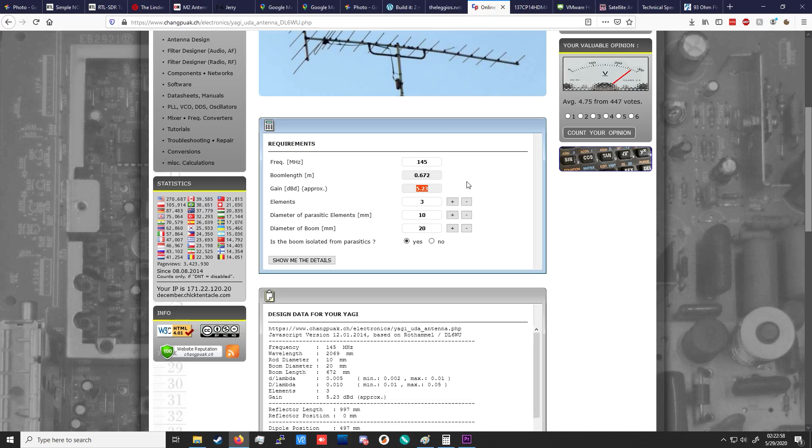And this guy is breaking the laws of physics on his website. This number's wrong. This should be 7.3 dBi. We can check that with an online Yagi calculator real quick where we see we get 5.23 dBd. That's gain relative to the half-wave dipole antenna, which we know plus 2.15 will give us the gain relative to the theoretical isotropic antenna, which gives us that 7.3 figure. This is not dBd, it's dBi.

That does bother me. I doubt he's going to fix it because the page is from 1993, but hey, one can hope. Also, some of these diagrams just aren't really useful. This has no scale whatsoever. We see there's a null in the back and there's a pattern out there, but I'm not sure what to do with this so much.

His theoretical radiation pattern is a little more useful to us. We can figure out the 3 dB beam width from this. This is minus 10 dB down at the second circle here, which happens at the full 90 degrees. So if you try to estimate 3, you can see it probably lines up with his 67.5 degree figure. He says we're 3 dB down. So yeah, that's about 3, 60 degrees just there. That's useful. His diagram for the measurements is very well put together.

And the really important design characteristic of this antenna is that it's super easy to match it to 50 ohms. Typically, Yagis match with a variety of different types of matching networks, but they're not done with lumped elements or coax. They're done with these things called gamma matches or T matches. And basically what they are is you put a small metal element behind the feed point of the antenna, and that metal element becomes the actual feed point. And then it has sliding bars on one or both sides of it, and you slide the bars between those two elements to tune the input impedance so it is what you want.

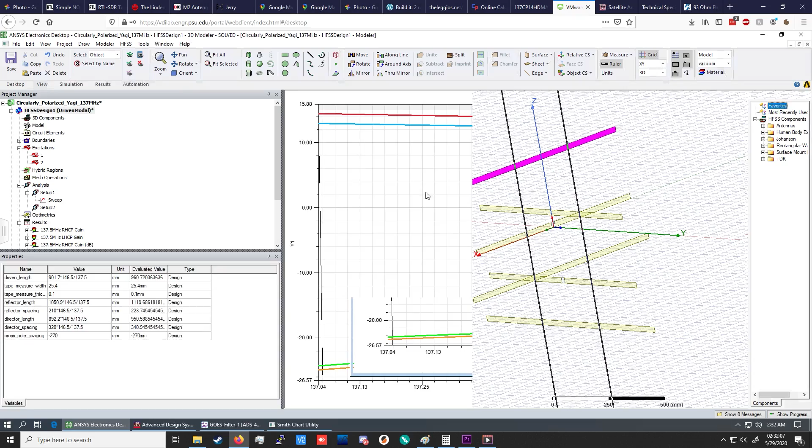So now we've seen the source material for a tape measure Yagi. How am I going to make that circular polarization? Well, the first thing I did was just draw 2 of these in, because when you want a circular polarized Yagi, you get 2 Yagis and you put them 90 degrees apart and then you phase them so that you get circular polarization correctly.

So I just drew 2 of these into HFSS here, and then I scaled the measurements by my frequency versus the original design frequency. So these are the stainless steel material from the stock HFSS library. I drew a director, my 2 driven elements separately, and then a main reflector, and I copied that for the second Yagi there, and then I rotated them 90 degrees.

Now everything in the simulation is defined from these variables: the driven length, tape measure width, reflector spacing, etc. I converted the imperial measurements from WB2HOL's write-up to metric in millimeters, and then I multiplied them by the ratio of my frequencies, 146.5 over 137.5, noting that the original frequency is on the top of this ratio, even though that seems to defy dimensional analysis, because remember, it needs to be 1 over f over 1 over f, so that we have a longer wavelength at lower frequency here.

So then I get all my new values, and there's only one measurement that was optimized by me as opposed to just scaled from the original design here, and that's the cross-pole spacing. And we'll get to why that is what it is in a little bit.

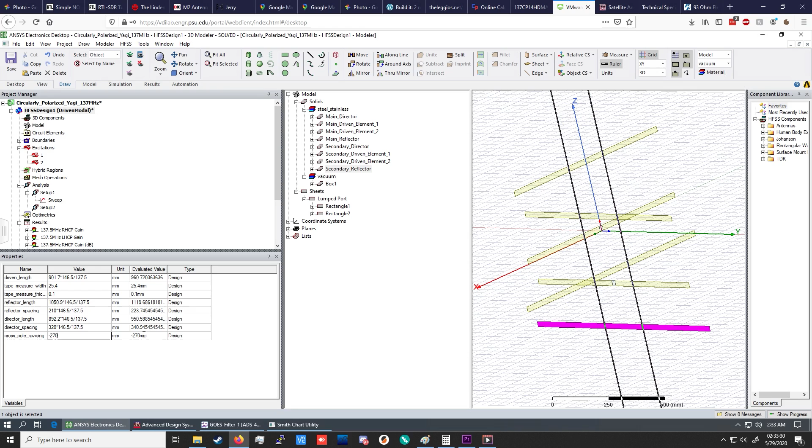But when I was initially starting out and I'm trying to figure out how to make a circular polarized Yagi, I know the general concept is to phase two Yagis that are placed in orthogonal directions to each other. I decided I'd go and I'd look at some commercial Yagi designs. So this one's by M2 Antennas.

This thing probably costs a small fortune. Less than 1,000, I bet, but something ridiculous, so I wasn't going to buy this. Also too heavy to move with your hands, probably. You can see that they're using that T-match network that I talked about earlier.

And you can see that they have, well, we could take a subset of this and just look at three elements here. So the ones with the T-match are the driven elements. Here's the one in the vertical, and here's the one in the horizontal. Now if we count the elements, we see we have a director, driven, reflector, and then that's the end of the vertical antenna here. And for the other antenna, we have director, director, driven, reflector. So the driven of the second antenna, the further back one, is behind the reflector of the first antenna.

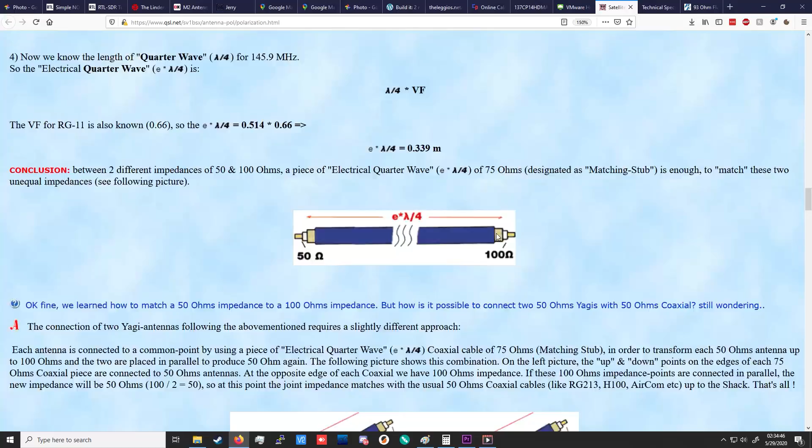Now, I had no idea why that was at this time. I was like, well, why does the spacing need to be what it is? But I found this really good reference, which I'll leave linked in the description, that's about making circular polarized Yagis for amateur radio satellite work. So they start by describing what is circular polarization, how do you get it. They show the naive approach, which is to build a helical antenna.

Now these guys work really well. They're not particularly difficult to match to. I actually wonder, and this is an open question for anybody that wants to try it, if you build a VHF or a UHF, like 440 megahertz or 144 megahertz, ham radio bands, helical antenna, and you're operating it in axial mode, can you use an IB crazy wave trap match down at those frequencies? That would be an interesting experiment.

The other option is, of course, the cross Yagi that we talked about. And now in this diagram here, these crosses look like they're right on top of each other. It's pretty difficult for me to tell, but it looks like the elements practically have no spacing between each other. So it turns out there's two ways to get the correct phasing between these, which is that basically, if the E-fields are starting at the same place, as shown in this diagram, we see the E-fields hitting this plane right here, they should be 90 degrees out of phase, right?

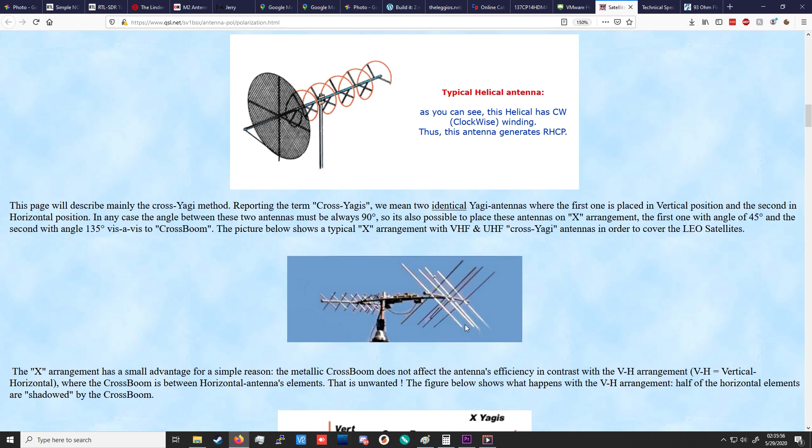So if your antennas are right on top of each other and the driven element of each antenna is in the same spot, you need a 90-degree phasing line. But if you have some spacing, that might not be the case. So the other purest option to get circular polarization is to do a lambda over 4 spacing between your two driven elements. So in free space, this represents a 90-degree phase change, and you'll get the circular polarization. Whether you get right or left-hand circular polarization depends on how you connect the conductors to each of these.

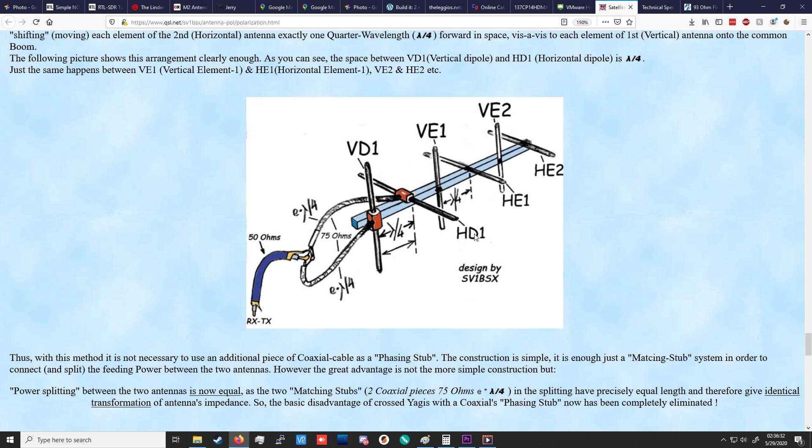So basically, you could go ahead and try it in the simulator, if you don't want to have to think through it. And if you have the wrong circular polarization, you just flip the connection on one of these guys, and it'll change the relation of the phase, and you'll get the other circular polarization.

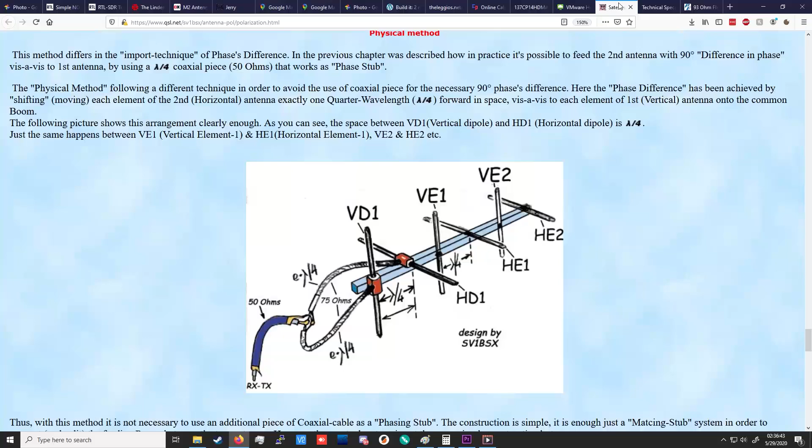Now, in my simulation, and based on their diagram, I'm not sure what their actual spacing was in this commercial Yagi, but with my driven element behind the other reflector, it's not a full quarter wave away. And if I made it a quarter wave away, the antenna would kind of be unwieldy, a little bit too long for my liking. Instead, I just went with what that spacing is, and I had to figure out what that was in terms of the actual phase change in free space. So that's a pretty simple calculation.

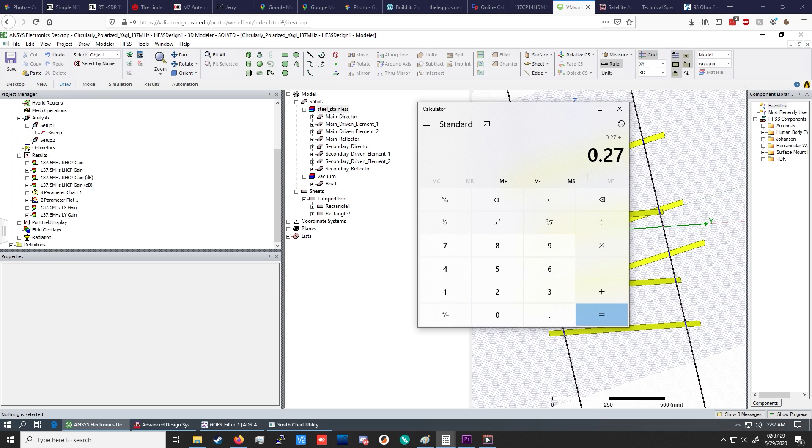Our wavelength is 2.18 meters, and we're 0.27, because it's 270 millimeters is the variable in the simulation, over 2.18, and then we know that we get 180 degrees every 0.5, so we'll go ahead and multiply that by 180 degrees and divide by 0.5, and we see that's a 44.5 degree phase change, which is effectively 45 degrees.

So in my simulation, what I'm going to be doing here is I'm going to be phasing my two excitations 45 degrees electrically, and then the other 45 degrees of phase shift that I need comes from the spacing between these two.

And again, that just comes from the variable here, which is called cross-pol spacing, and in my case is 270 millimeters in the negative direction.

So about how to excite the antenna in HFSS. Drawing objects in HFSS is something you can find a lot of tutorials for. Understanding excitations and understanding how to phase excitations is not something you can find a bunch of tutorials on. So I'm going to go through that with you right here.

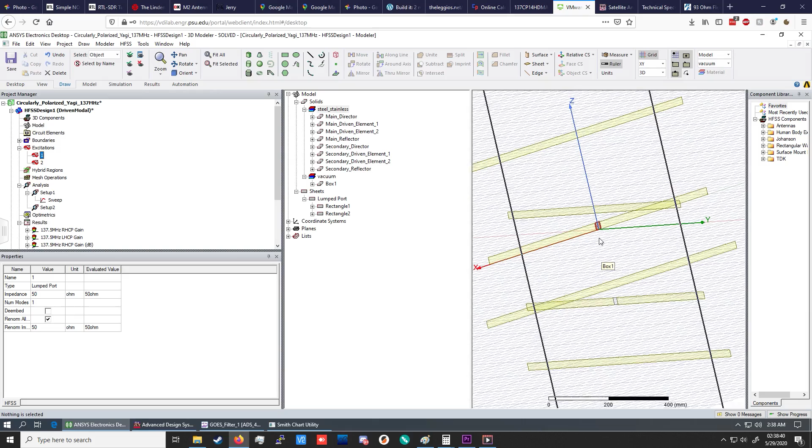So first things first, there are two types of excitations in antenna modeling programs, and those are lumped ports and wave ports, or at least those are your two primary types of excitations. Now, lumped port is what you want to use like 90% of the time. If you're doing simple antenna stuff and you're not dealing with waveguides, you want a lumped port, because you only have one mode that you're concerned about from your coax or whatever's feeding it.

When you make a lumped port, you create a surface, and on that surface you draw this thing called an integration line. And that sounds scary and confusing, but it's really not that bad, and I just had to have a grad student actually tell me how to do it because I couldn't find out how to do it anywhere else. It's climbing Mount Stupid without knowing the right words to Google.

But what this means is just think about the direction of the voltage potential. So if I'm feeding this, and my center conductor is to the right on this half of the Yagi, and my shield is to the left on this other half of the Yagi, my shield is ground, and I have a voltage on my center conductor. So positive to ground, and I draw my integration line. And that's all there is to it.

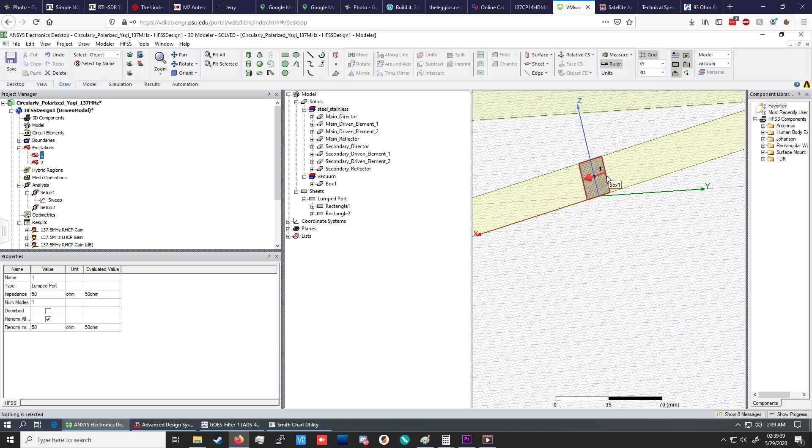Now, we'll have to pay attention to the direction of that line later when we're building the antenna, because we need to make sure the center conductor agrees so we get the right circular polarization out of it. You can see that port 2 is exactly the same with its setup, and the fact that this line starts on the left and goes to the right tells us which end has to be the center conductor relative to how we're looking at the whole antenna and the other port there.

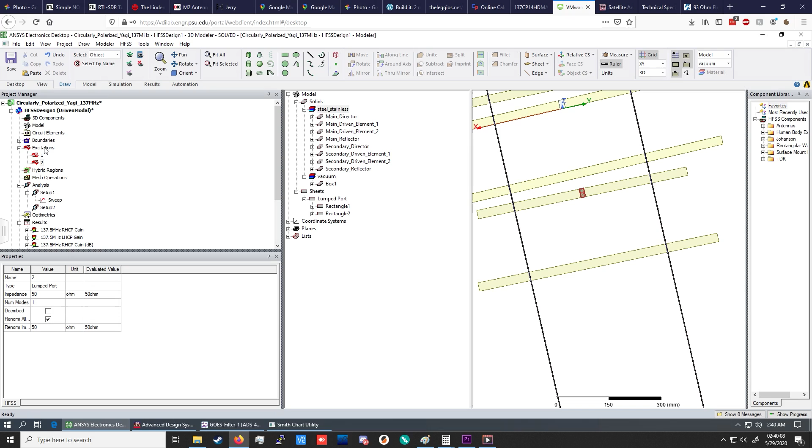Now, for the phasing, you can't do it directly from these port declarations. Maybe you can do it from properties, but I haven't found a way to do it like that. You have to go up to the whole excitations category, and then you go to Edit Sources, and it'll ask you for a magnitude of the source and a phase.

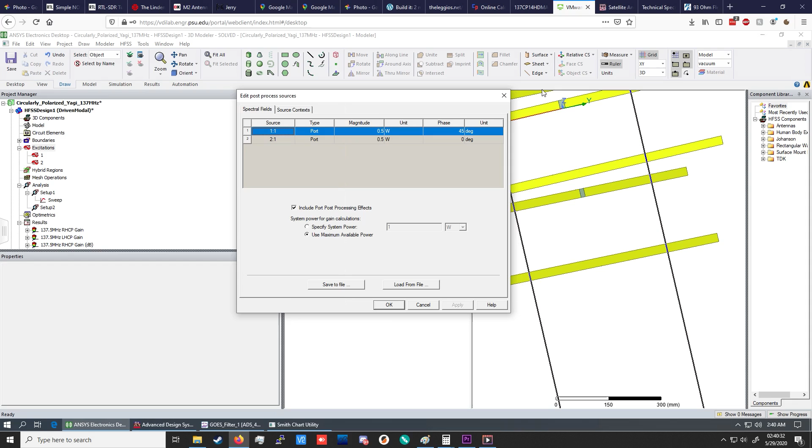So that's what's important. I want port 1, which is the upper port, 45 degrees behind the first bit that's being driven here. So I get 45 degrees from free space, and then I add an additional 45 degree delay, and I have 90 degree phasing, exactly what I want. So once I had that, I could just go ahead and simulate it, right?

Yes and no. I'm not sure exactly what caused this, but I had a lot of problems with convergence in this simulation. So convergence in HFSS is defined by this metric called delta S, or the magnitude of delta S, which describes the magnitude of the change in the S parameters matrix, and you define a maximum. The program defaults to 0.02, but I upped that to 0.1, and I'm getting about 0.07.

So basically, when I ran this with the stock settings, you have a couple of options for solvers here. And the stock options are maximum refinement per pass 30%, order of basis functions first order, direct solver, and 6 passes. Now, I was not able to get that to work. I kept the maximum refinement per pass. I had to go up to second order for my basis functions, and I ended up using the iterative solver with the stock relative residual value.

I don't exactly know how to explain what all this stuff means, nor do I really know what it means myself, but the point is that it's converging and the results make sense, and they've agreed with my real-world results. So note that you might have to change settings to get this to converge.

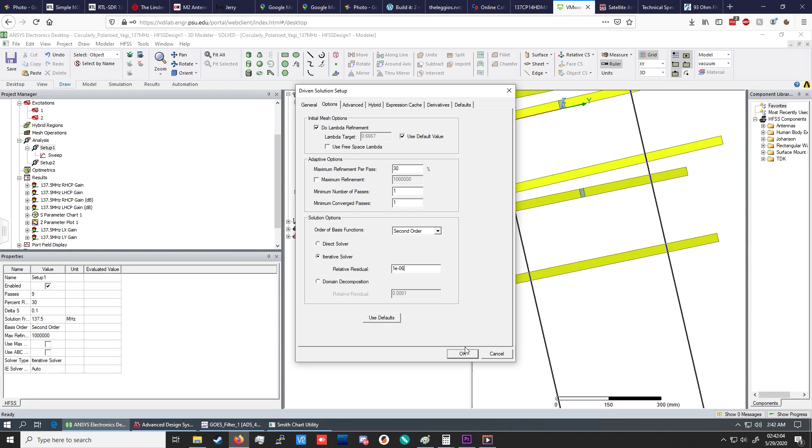Then the settings are the same for the other guy, and I have 2 solution setups here because I want one of these to just give me the radiation pattern and the other computes the input impedances. It saves a little time if I just wanted to change something and look at the radiation pattern. So onto the solution results.

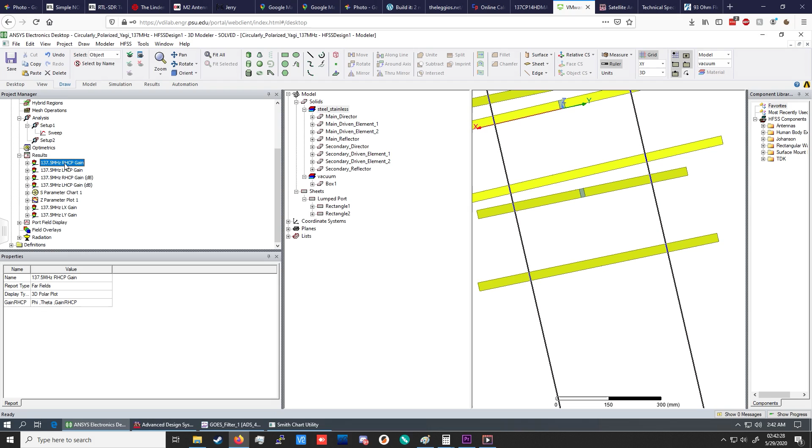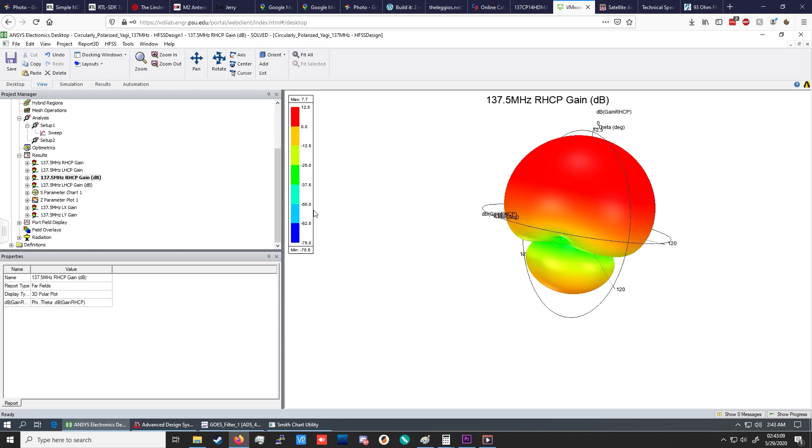And that's consistent with the original tape measure Yagi design. If we go back to that, he says front to back is, well, greater than 50 dB. So we're not as good, but we're not really designing for front to back. This isn't a direction finding antenna, it's a satellite receiving antenna.

For left-hand circular polarization, we should see practically nothing. This is the linear gain units, and we have gain of 0.3 at the maximum. So this is always losing. 1 would be 0 dB. If we look at that in dB, we'll see the maximum is minus 5.1 dB. So very good. We have almost total LHCP rejection. Not 20 dB of rejection everywhere, but at least 5 dB. That's good enough for what we'll be doing.

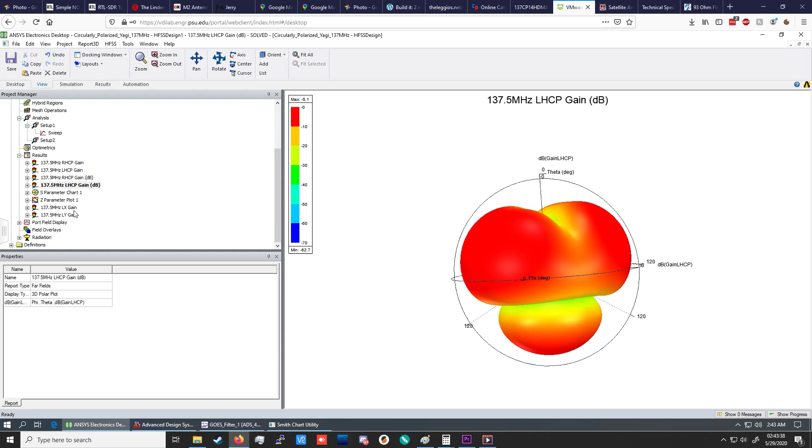We can also go ahead and look at the linear gain in the X direction and the Y direction. That should be close to half of the RHCP gain. Now remember when we looked at the linear RHCP gain, it was 5.9. So 3 is about half of that. We see the LY is 2.9 and the LX is 3.05. So it's not perfectly balanced, and that probably comes from the fact that it was

44.58 was the phase difference in free space, and I put a 45 degree phasing line. But we're not going to be able to be more accurate than that in manufacturing anyway. So I'm happy with that. That's pretty balanced between LX and LY, so we're not looking at crazy elliptical polarization. We're right-hand circular polarized dominant.

We have gain 7.7 dB. So our actual performance will be, over an isotropic non-circular polarized antenna, 7.7 plus 3 is almost 10.7 dB over an isotropic linearly polarized antenna for receiving. So that's pretty cool.

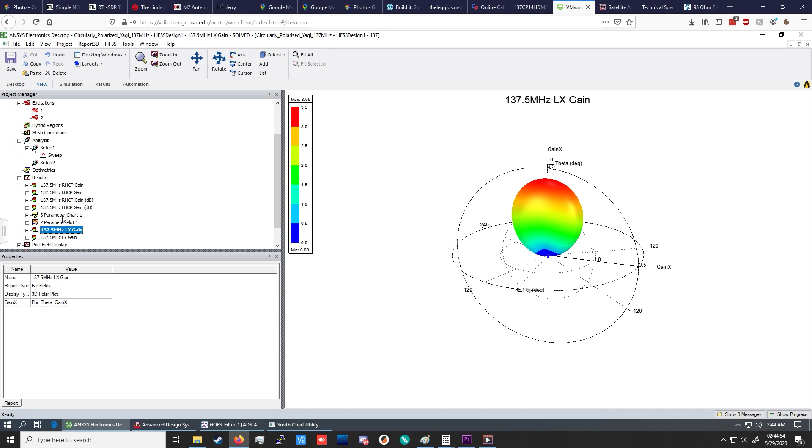Now after I simulated the radiation pattern and got what I wanted in terms of design, which didn't require too much tweaking, just the cross-pole spacing a little bit to make everything fit, I needed the input impedance. So we can look at that on this S parameter chart right here. And this is actually in the same position on the S parameter chart as the other tape measure Yagi. So the input impedances didn't change too much.

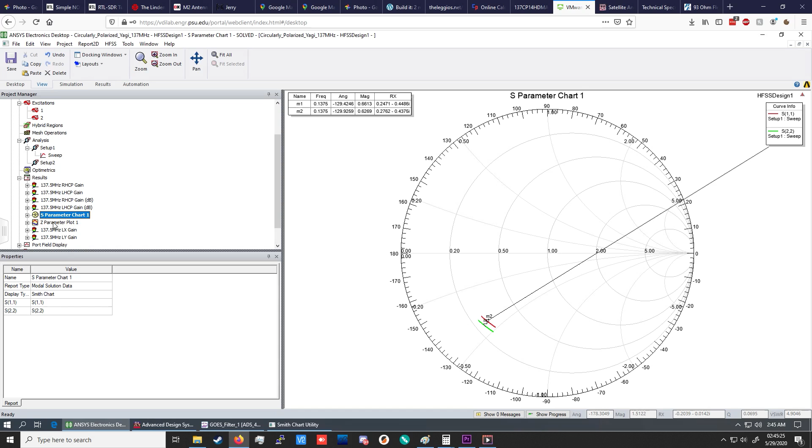And this position is really great if you wanted to match to 50 ohms again, because all you need is that short circuit stub. You move along where my mouse is with a short circuit stub just like this, and you get to 50 ohms real quick. But we don't need to match to 50 ohms. We'll need to match to 100 ohms, and we'll go over why that is in a little bit. So then I made a rectangular Z parameter plot, and this allows me to read off the complex impedance directly here. So this is pretty useful for designing the actual matching networks.

So now that we know the Z parameters and that our radiation pattern is correct, we need to design a matching network and a phasing harness for the antenna. We know that the phase between the two antennas needs to be 45 degrees electrically, at least that's what we're going to put in the phasing harness, because we get the other 45 degrees in free space. And we want the total input impedance of the whole thing 50 ohms, so that we're matched to typical 50 ohm equipment. That's going to mean that each antenna has to be 100 ohms, because 100 in parallel with 100 gives you 50 ohms.

Now, it's important that they're each 100 ohms and not some other combination that ultimately results in 50 ohm impedance. The reason for that is that if they're not both 100 ohms, then you have unequal power distribution between the antennas, and even though you have the phase right, one will be overpowering the other, so that will also give you some kind of elliptical polarization. It's a similar effect to having the phase incorrect.

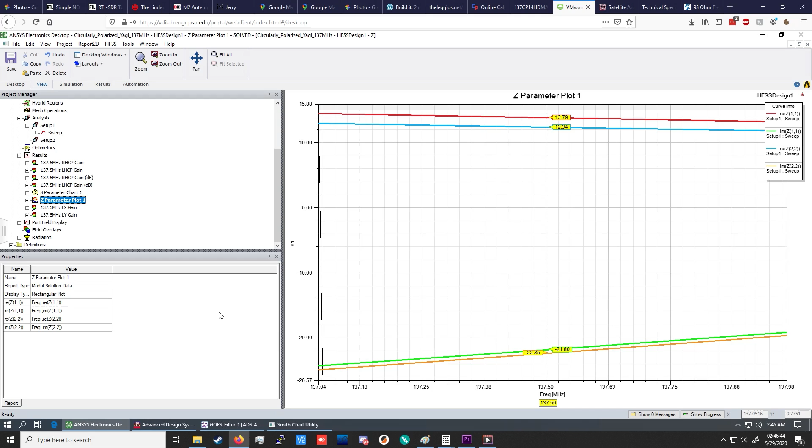So how are we going to go about designing a matching network that meets those constraints? Well, step one is to match each antenna input impedance to 100 ohms. So to do that, I'm going to use the ADS Smith chart utility, because I'm pretty familiar with it. So first I go ahead and I set up the Smith chart utility. I'm setting the center frequency to 0.1375 gigahertz, which is 137.5 megahertz.

I'm going to keep with Z0 is 50 ohms, but we're not going to be matching to the center of the chart anymore. We're going to be matching to 100 ohms, so it's going to be over here to the right. And then we have to define the source and load terminations. So right now I have in here the numbers for the Z22, which is 12.34 minus j22.35. And that's where we're going to be starting.

We have to enable the terminations, complex impedance, you select from this drop-down. And the source termination is 100 ohms resistive. So you go ahead and apply that. And then it's only going to take two elements to do this match, but I'll delete these real quick and I'll show you first. So again, if we had a short circuit transmission line, we're going to get 50 ohms. That's pretty straightforward and we get a good match there. But that's not what we want.

Instead, we want to match to that 100 ohms, and there's no way to get there with that simple short circuit transmission line because it's constrained to this circle. Also, an open circuit, if you've worked with Smith charts before, you'll know that this is constrained to this circle. So there's no way that we're getting over there with one element match of transmission lines like this.

Now, there's other options than what I'm going to end up doing. There's a lumped element matching solution here that's a series capacitor that wasn't too bad. I think it was a value that I actually could get a hold of without too much difficulty. And then I could use an open circuit or a short circuit stub. Short circuit was shorter, I think. And we could get to the 100 ohm input impedance.

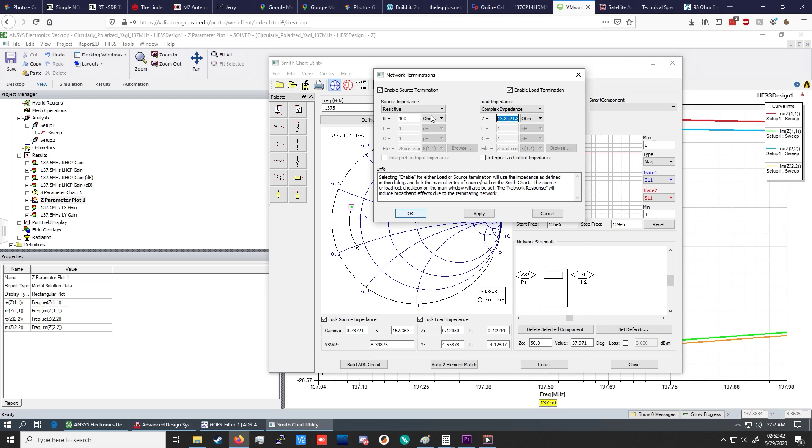Now, to demonstrate the point here, I'll renormalize the chart. So we normalize to 100 ohms, and we're going to start at 100 ohms there. Enable, apply. So we have a chart normalized, we're at 100 ohms, and we're going to take a 93 ohm transmission line. This will result in a very minimal movement. There's a tiny little circle there. It's not exactly staying at the origin, but it's not a lot of movement. So that's why we want to use 93 ohm line and not 50 ohm line for this purpose.

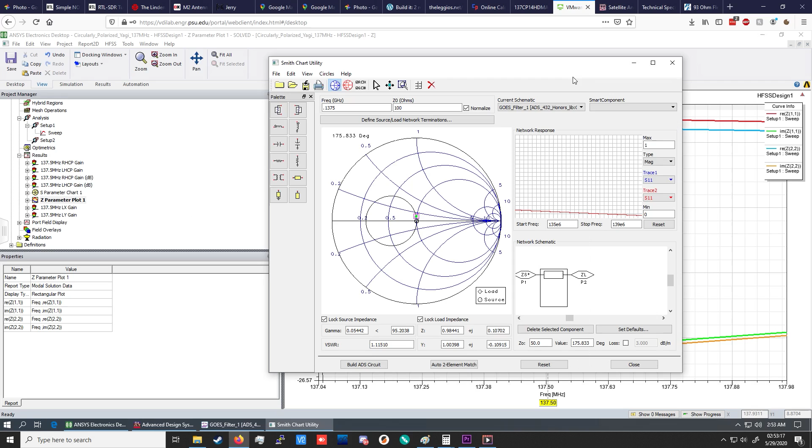If we were to use 50 ohm line on this Smith chart with this normalization, it would move all over the place. So you have to manually set it, but you can see that that circle is much bigger, and we would have to deal with impedance transformations here, which we don't want to do. So this was the theoretical phasing harness.

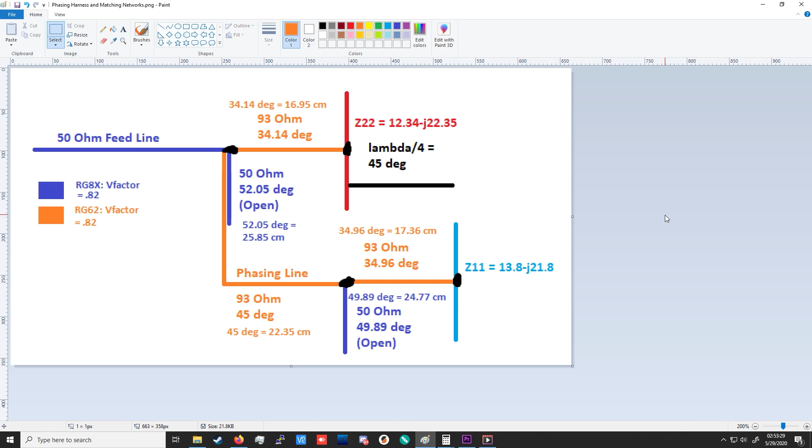So now we have the theoretical phasing harness, the antenna, and the dimensions, and everything that we'll need to go ahead and build it. So here's an Excel chart of the relevant measurements that you're going to need to build the Yagi out of 1-inch tape measure, and the phasing harness over on the left along with the theoretical input impedances. Now, a word of caution, I would not recommend building this phasing harness with the physical measurements that are in here. The input impedances did not line up exactly in the real world as they were in the simulation. As a result, the phasing harnesses with these lengths didn't work perfectly on the first go.

And you also have to be careful about the length of coax outside of the actual coax shield when you strip the end. That does significantly affect the phasing harness and the matching networks. So in my construction, I ended up using ring connectors and 1/4-inch bolts and nuts to keep everything together, and that had a significant effect on the matching network. So you're going to have to be careful with that. I'll go over that process in more detail in the next video, but basically I ended up tuning both matching networks to 100 ohms and then combining them with a phasing line that was likely close enough to 45 degrees.

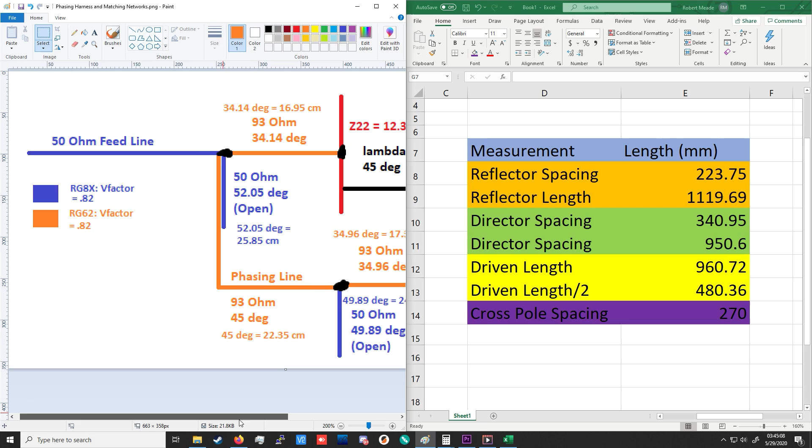So a combination of a couple things being different did cause some changes in the physical build, but this is the correct theoretical phasing harness. It's just that these velocity factors might not actually be 100% as in the spec sheet at this frequency. The input impedance probably wasn't exactly what was simulated. I did try and measure it, and I got slightly different results, but it's a pretty difficult measurement to make with the NanoVNA, at least to get good results. And then the termination of the coax stubs with the ring connectors certainly has an effect on the matching network.

So I'll go over the actual measurements for what I cut and ended up working, giving me at least a 2-to-1 SWR. I think I was able to get 1.6 at center frequency, and it performed very well in terms of receiving NOAA and meteors, so it must be okay.